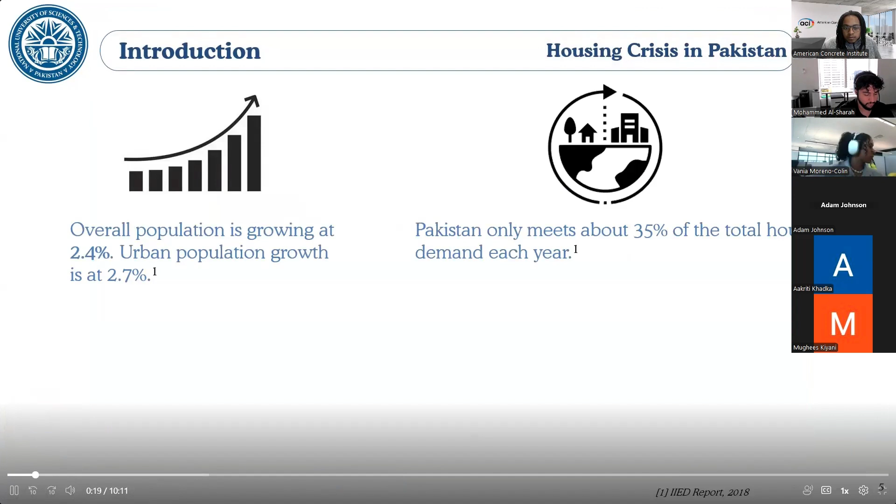Hello everyone, the topic of our research project is formulation of printable mix design for prefabricated beams. Here's our team, here's the table of contents. For introduction, let's begin by looking at a crisis that affects every corner of Pakistan, which is housing. Our population is increasing rapidly, but we're only able to meet 35% of housing demand every year. Housing prices are skyrocketing, but GDP per capita has barely increased.

So how can we solve Pakistan's housing and infrastructure crisis? Not through patchwork fixes, but with technology that fits our context. Traditional construction, currently implemented in Pakistan, suffers from extended project timelines, which decreases productivity. Labor accounts for up to 30% of total cost, and high energy consumption makes this process environmentally unsustainable. Globally, we've seen alternatives like modular construction, automation, and robotics, but one promising solution which combines the benefits of all three is 3D concrete printing.

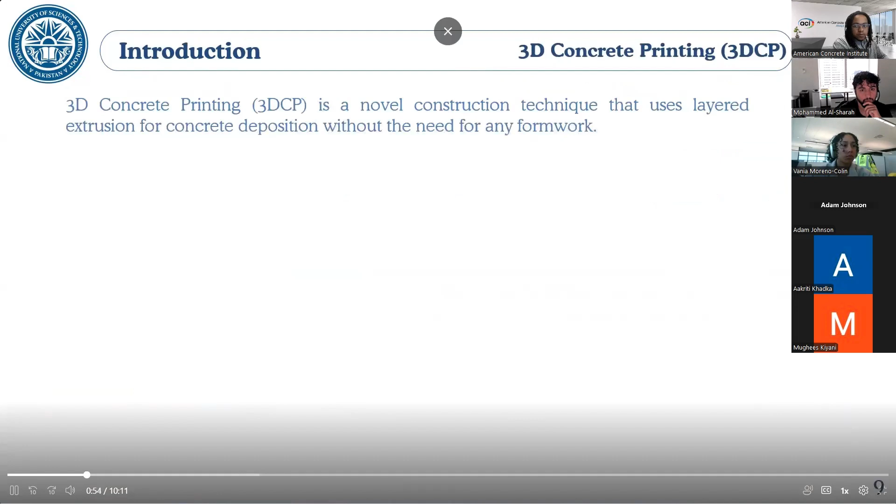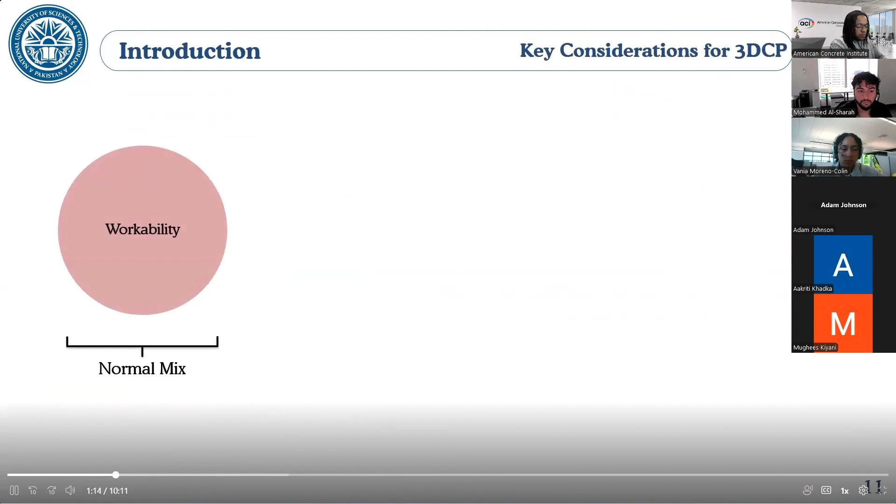It is a layered free-form technology where concrete is deposited through robotic extrusion. It starts with a digital design, formulated by material formulation, and ends in robotic extrusion. The final step is curing and finishing. It has a lot of benefits and replaces the most time-consuming and costly steps in traditional construction. In a normal mix, the only fresh property we care about is workability, but in a 3D concrete mix, you need print mix properties and process parameters, and they both have to be in harmony in order to achieve a successful print.

In literature review, we found that 3D print mix uses complex additives, which increases the cost and makes it complex to reproduce locally and scale. The printed structures have higher chances of shrinkage, so we can use fibers.

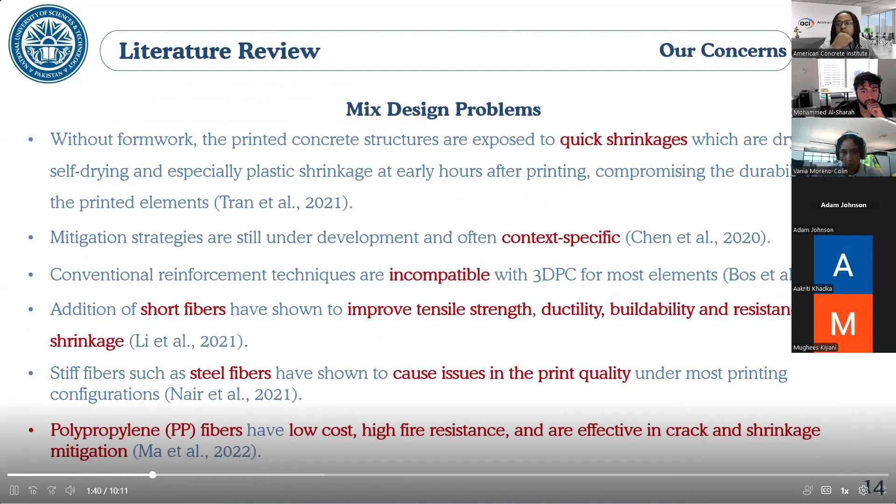Steel fibers, however, disrupt the print quality, but polypropylene fiber offer a fire-resistant alternative. 3D PC still has higher quantity of cement, so we found a sustainable partial replacement, which is metakaolin, and it also improves the compressive strength.

In 3D PC, 80% of research is done on mix design, but only 1% research is done on building level integration. And within that 1%, walls and columns are commonly printed structures. So we wanted to print and optimize beams such that they balance the material use and mechanical properties.

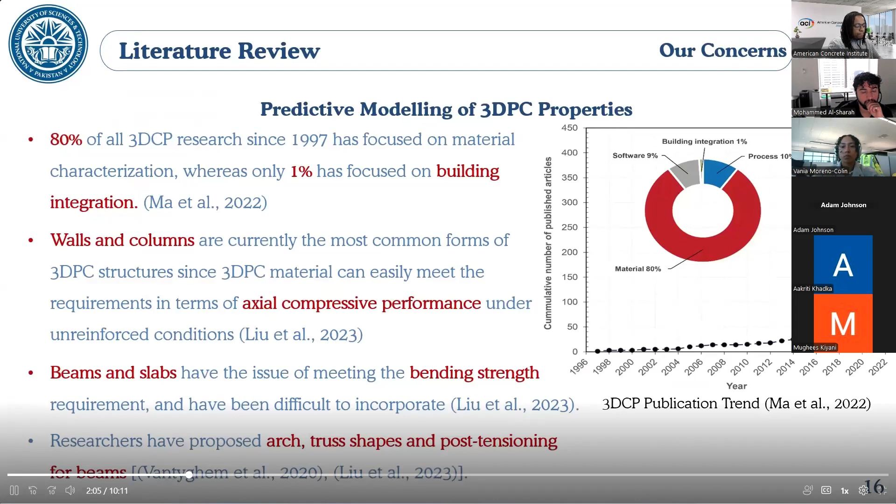Based on the literature review, we formulated two problem statements. And based on these two problem statements, we defined our objectives and divided our project into three corresponding phases.

So in phase one of our research, our objective was to develop a simple, sustainable, and of course, a printable concrete mix design. This is an overview for phase one.

After selecting process parameters and adequate mixing, each mix was assessed based on a number of fresh and hardened properties. All our materials were locally sourced, and here's the rationale for the selection of each material.

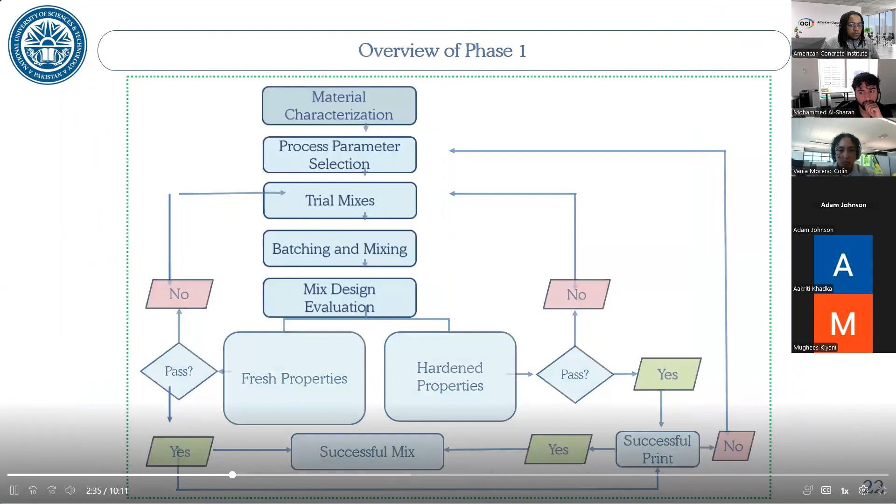Now, this slide gives an overview of the effects of each printing parameter on printing, and each plays an important role. For print, we chose a circular nozzle as it facilitated the printing of complex geometries.

Nozzle size was kept at 25 millimeters as it struck a balance between good printing resolution and good printability. Stand-off distance was kept at 15 millimeters, which gave good interlayer stability.

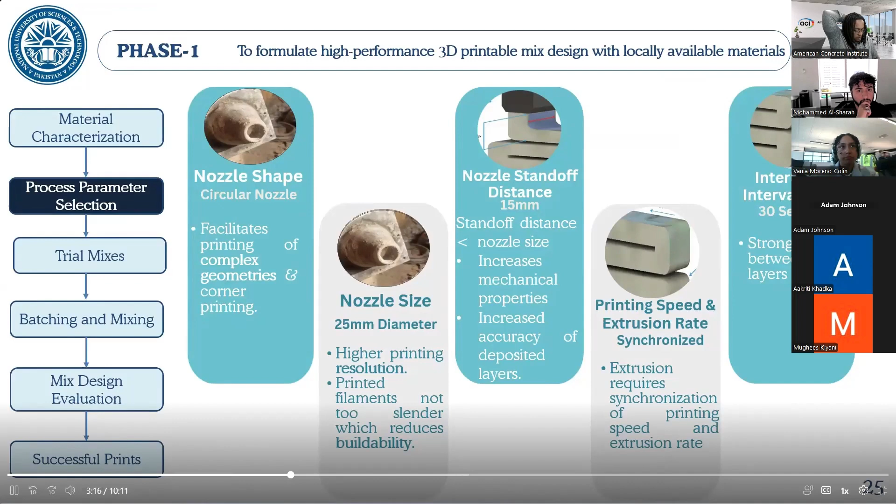Next, print speed and extrusion rate were experimentally kept in sync to avoid breakage or flat elements. And lastly, interlayer interval time was naturally about half a minute due to our short print paths.

So this is the mixing standard which we developed for the smooth flowable mix. And in this phase, we tried a total of 27 mixes, out of which we chose representative 8, which I'll shortly discuss.

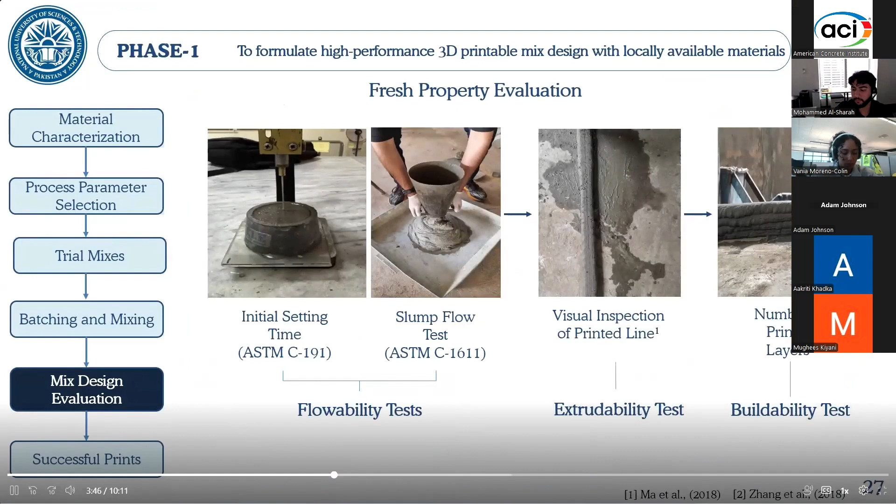So coming over to evaluation of our mixes, first we looked at the fresh properties. For the flowability, initial setting time and slump flow tests were performed, while extrudability and buildability were inspected visually.

Here, the first three mixes fell in the zero buildability region and were too flowable, while the last three were not extrudable due to being too stiff.

Mix 4 and 5 fell in the optimum slump range, and mix 4 was chosen as a base mix due to superior print quality.

The initial setting time test showed the same trend, and using that correlation, we drew an optimum range for adequate flowability.

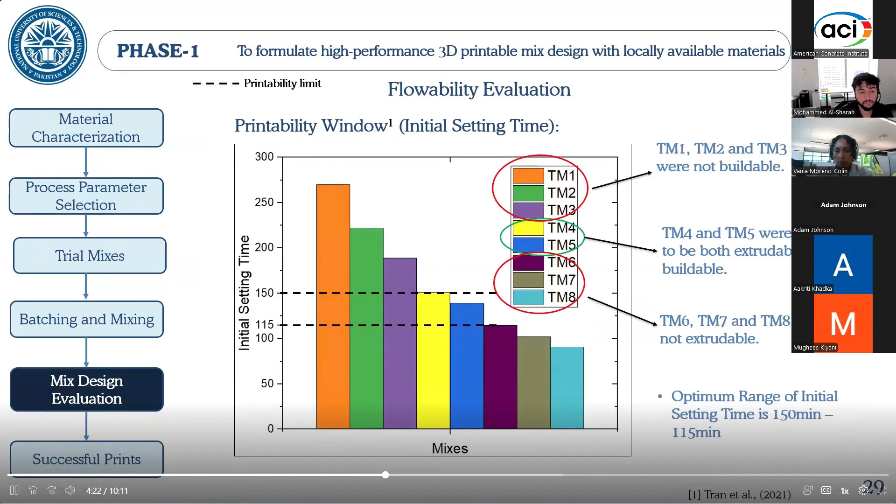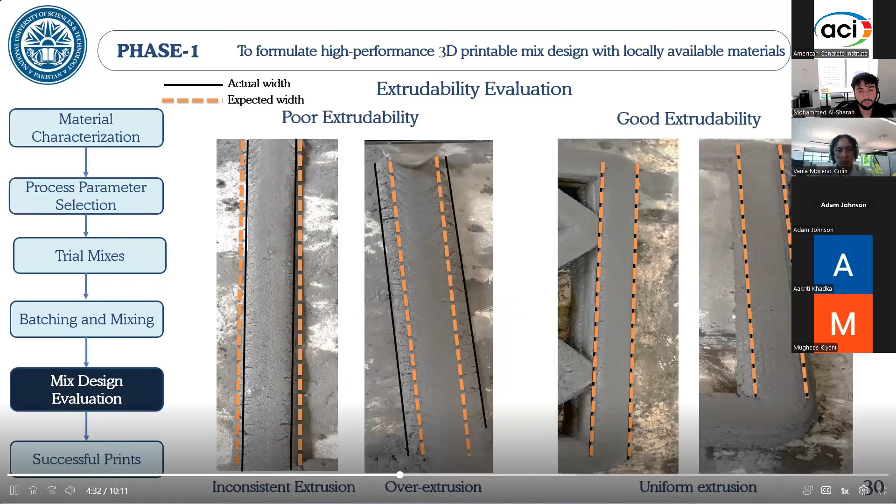These are some examples of poor extrusion. As can be seen, the expected and actual widths do not match, while these two on the right are examples of good extrudability as the expected and actual widths do match.

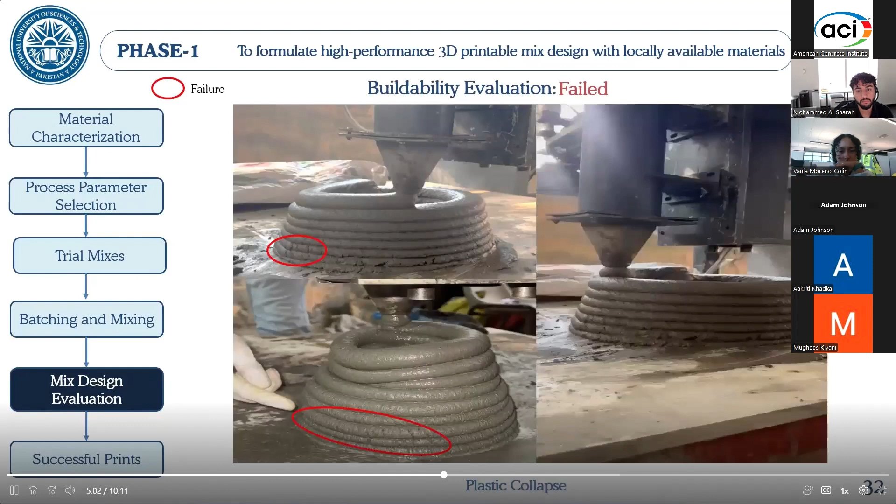Once we established our base mix, we sought to improve certain properties of our base mix with the addition of polypropylene fiber and metakaolin. This is an overview of our methodology for phase 2.

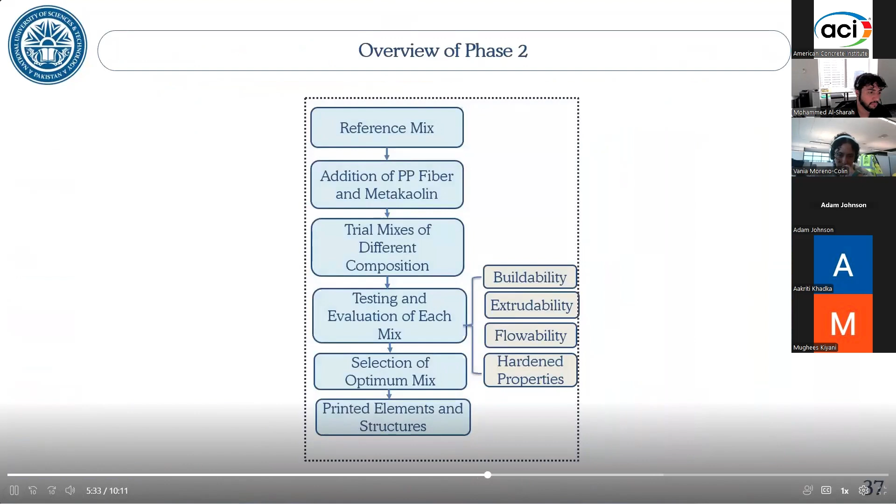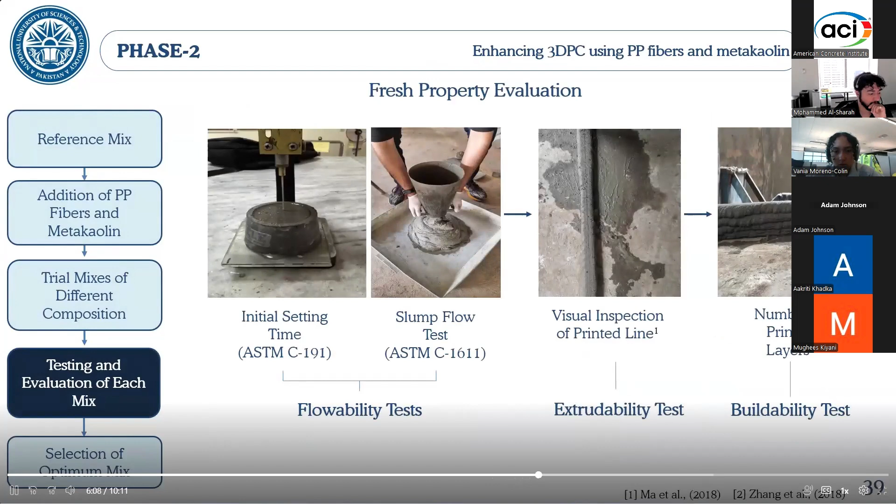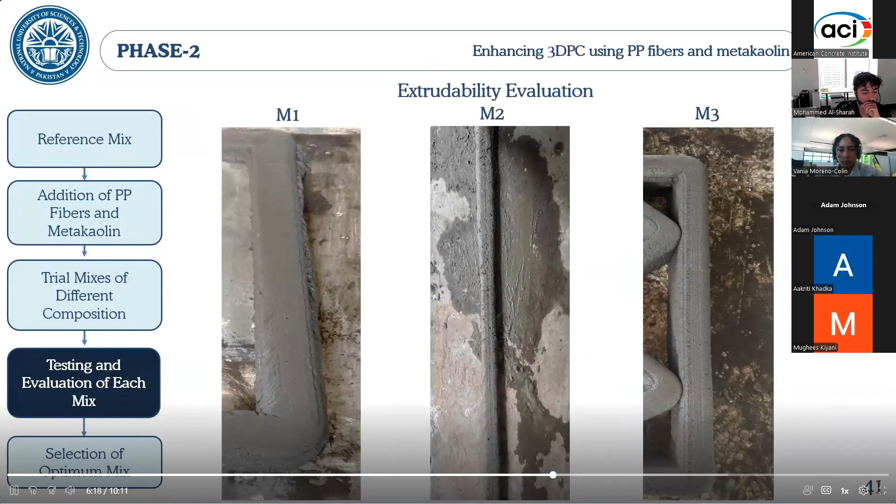Both M2 and M3 fell in the optimum flowability range, which we established while developing our base mix. M2 and M3 also passed extrudability criteria. All mixes had deformation below the limit stated in literature, so buildability wasn't an issue either. All 3 mixes also had adequate strength.

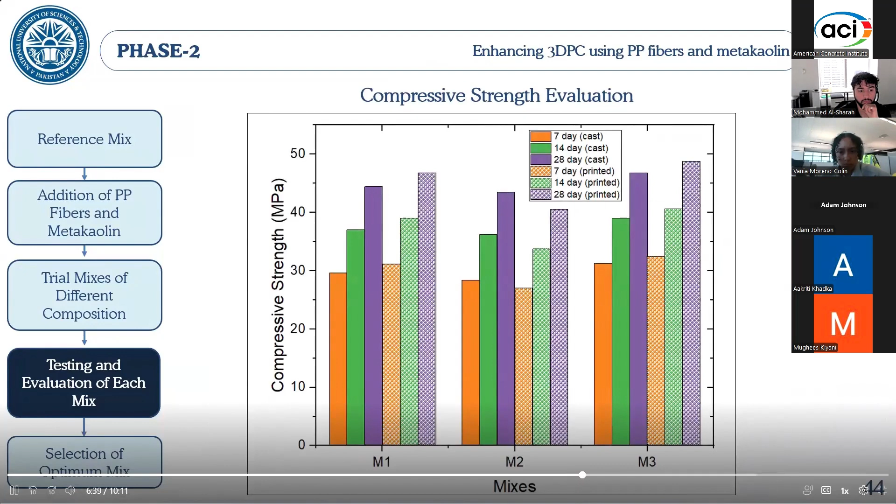This is an overview of our compressive strengths. Printed specimens showed higher strength due to the compaction caused by the nozzle of the printer.

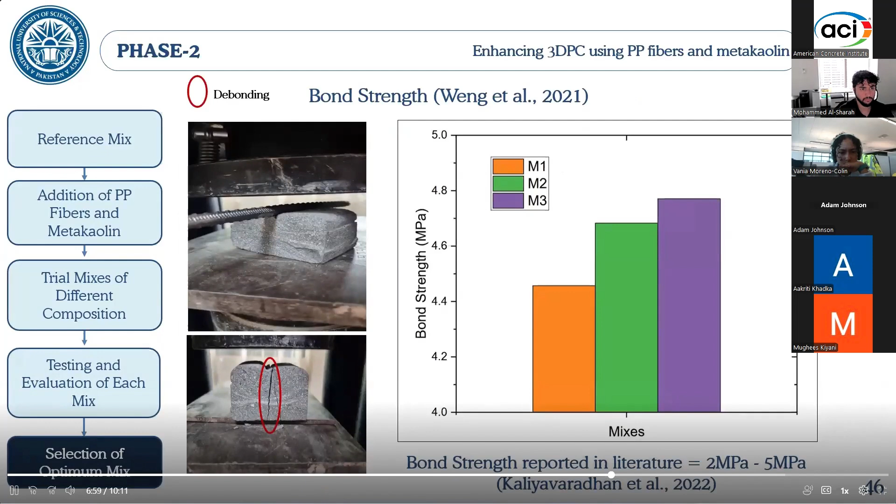So for the third and final phase, we wanted to test 3D PC beams both experimentally and numerically. Here is the overview of our third phase.

As mentioned earlier, 3DPC allows us full architectural freedom and to print optimized geometries whilst reducing the material usage and the self-weight. For this reason, we chose 2 geometries: the first one being the truss infill beam, which reduces material usage at low stress points, and the second being the arch infill beam, which efficiently distributes compressive loads.

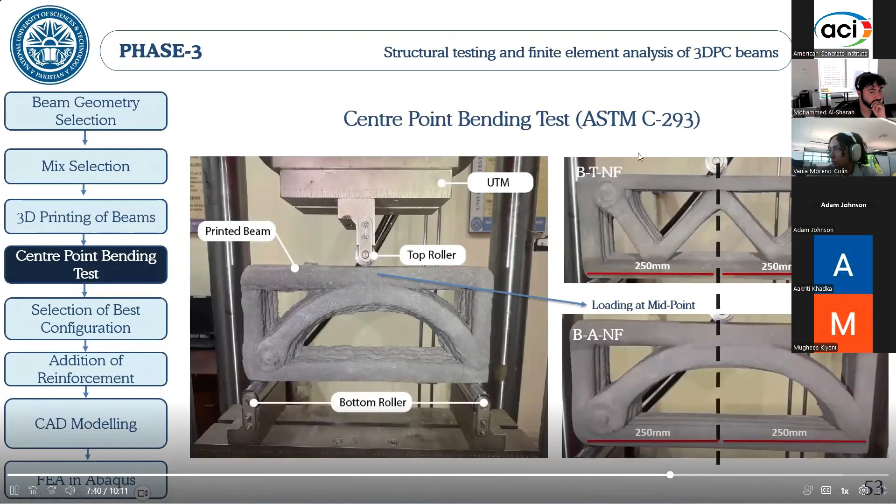Both the beams were printed using the M1 and the M2 mix. All the 4 beams were tested under the center point bending test, and crack initiation was observed for all the 4 beams. A common observance was that the cracks developed near the joints where the stress concentrations were high, mostly in the bottom fibers, and the fiber reinforced beams exhibited a ductile failure.

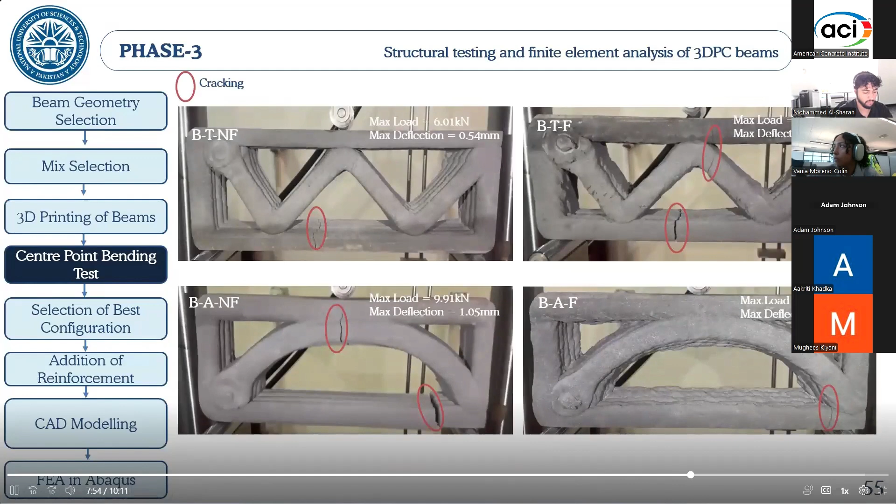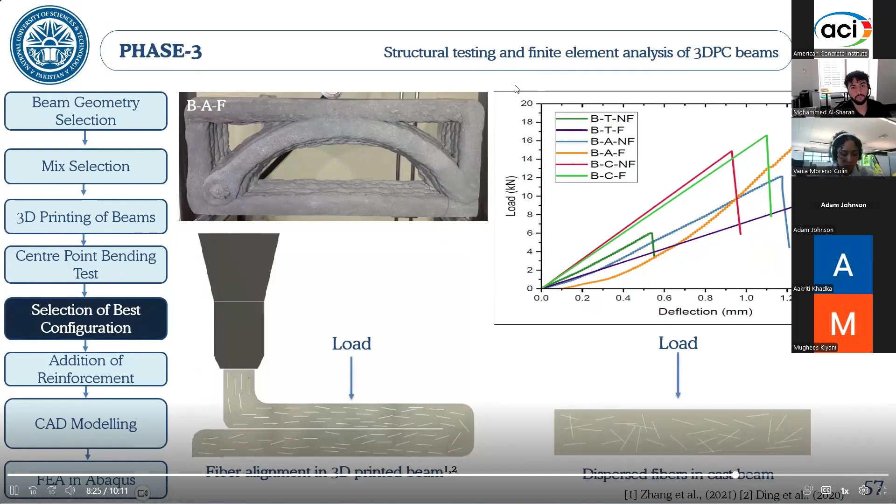This exceptional increase in the flexural strength of the arch infill beam can be attributed to the high degree of fiber alignment observed in 3D printed beams, as opposed to a cast beam in which the fibers are randomly dispersed. For the numerical analysis, we modeled the arch infill beam in Fusion 360 and imported it in Abaqus.

We used it to simulate our tests. We used a tied interaction between the layers, used static general for monotonic loading. We used roller supports on both sides to mimic the real-life experimental conditions, and used an 8-node linear brick element for the meshing.

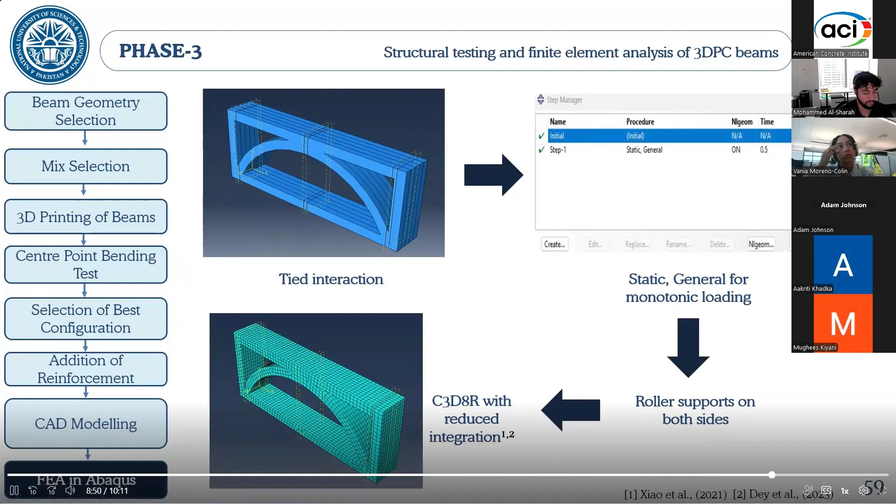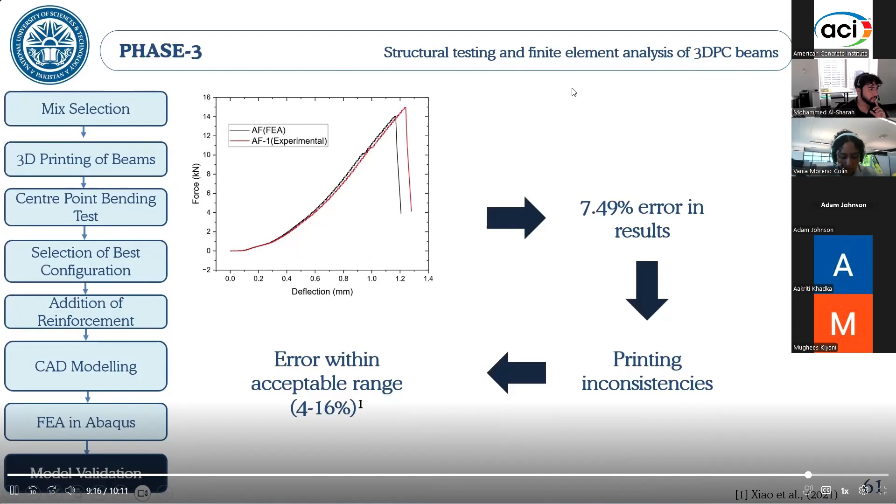Comparing the experimental and the FE results, we saw a 7.49% error in results, which can be attributed to the printing inconsistencies. However, this error was within the acceptable range as given in the literature.

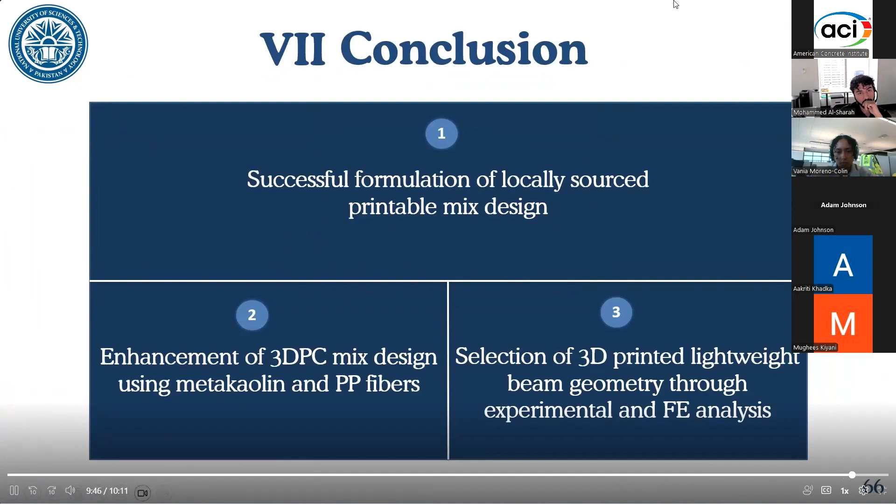For our future goals, we want to optimize this 3D printed arch infill beam via a parametric study. We aim to perform some durability tests for our 3D PC mix, and finally, we want to explore other suitable low-carbon materials in Pakistan. Ladies and gentlemen, thank you so much for your time.

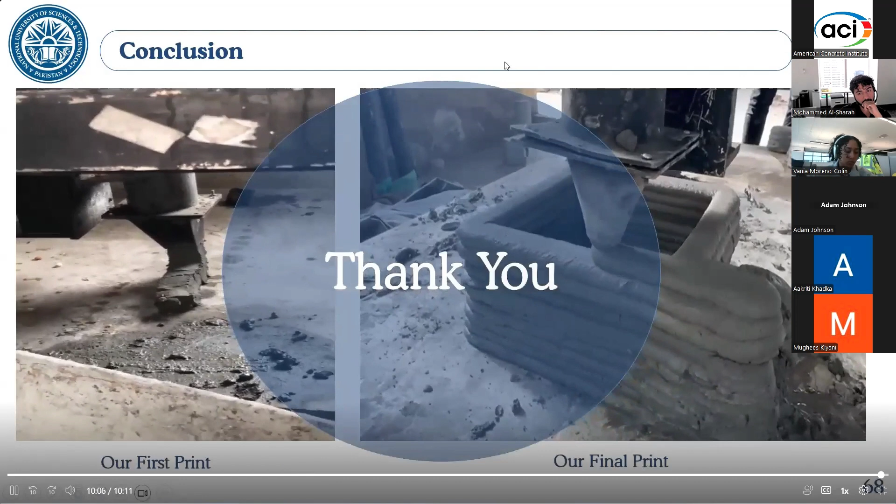Start us off. How soon do you think something like this could be implemented into industry standards and be part of our code?

Thank you so much for the question. I believe we are still at the infancy of this technology. As far as 3D printed beams are concerned, there's a call for more research on 3D printed structural elements, especially beams and slabs. So as far as industry adoption is concerned, I think we need more research, more data, and especially more research on its constructability.

As well, we need more parametric research to optimize the beam shape. So I think it could take about 4 to 5 years before we establish a proper theoretical framework on its design and constructability.

Thank you. That's exciting stuff.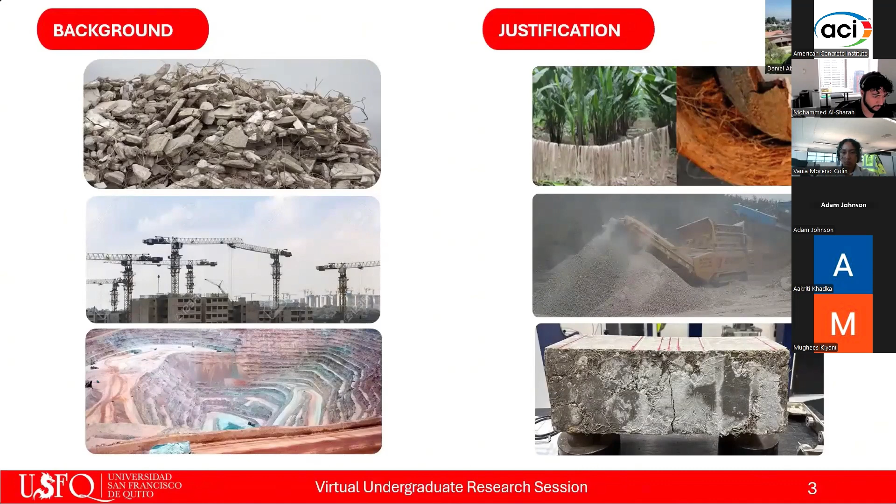A sustainable response is recycling construction and demolition waste, focusing on concrete, the most used anthropogenic material. Yet recycled aggregates often have lower quality and higher impurities, raising water absorption, reducing workability, and weakening strength. Fibers, particularly polypropylene, can improve tensile resistance and limit cracking, but they are not eco-friendly. Here, natural fibers like coconut and abaca, abundant in Ecuador, emerge as a greener alternative. This study, in collaboration with Holcim SA, evaluates concrete made with recycled aggregates and natural fibers, comparing it against traditional mixes with natural aggregates and synthetic fibers, aiming to propose sustainable large-scale solutions.

We processed 180 tons of construction and demolition waste, removing unsuitable materials like steel, plastics, and general debris. The aggregates were classified under ASTM standards into three gradations: number 57 stone, number 7 stone, and sand, with only 1% discarded as non-usable material. Recycled aggregates were obtained through debris collection, manual sorting, and metal removal using an electromagnet.

For reinforcement, we used three fibers: commercially available polypropylene fibers as the synthetic control, with a length of 2 inches and a diameter of 0.03 inches. The natural fibers, abaca and coconut, were sourced from Ecuador's Santo Domingo and Manabí provinces respectively. Both natural fibers were 4 inches long with a diameter of 0.008 inches. The modulus of elasticity of the natural fibers was tested at the Materials Laboratory of Universidad San Francisco de Quito, with the results presented.

The aggregates were first tested for gradation, density and absorption, abrasion, uniformity, and alkali-silica reactivity, following ASTM standards. Two concrete formulations were designed. The first used number 7 stone and sand due to formwork geometry, with a water cement ratio of 0.45 and 60% aggregate by weight, 60% coarse number 7 stone and 40% sand. The cement was type GU, a general use pozzolanic cement in Ecuador.

Six mixes were produced: three with natural aggregates combined with synthetic and natural fibers, and three with recycled aggregates using the same fibers. From each batch we cast 4 prisms, 20 inches by 6 inches by 6 inches, and 6 cylinders, 4-inch diameter by 8-inch height. Three cylinders were tested in compression, and one was sliced into discs 1 inch thick for dynamic modulus testing.

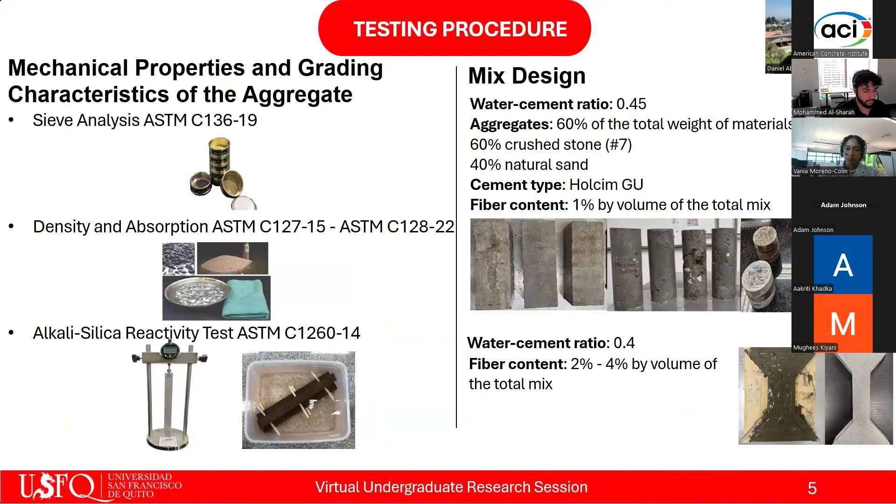We evaluated the mixes through 4 tests: compressive strength, flexural strength, dynamic modulus of elasticity, and direct tensile strength. Compression tests were performed on 4 by 8-inch cylinders after 28 days of curing. Flexural strength of the fiber reinforced prisms was measured following ASTM C1609, also at 28 days.

A key parameter of this study was the dynamic modulus of elasticity, assessed on 4-inch discs, 1 inch thick, made with different aggregate and fiber combinations. The test followed Hutchinson's model of flexural vibration of circular plates with free boundaries, where the modulus is derived from the natural vibration frequency. The procedure involved dropping a 150 gram steel ball on the center of each disc. A high-frequency accelerometer was glued to the opposite side, and its signal amplified and sent to an oscilloscope. Using MATLAB and a fast Fourier transform, we extracted the dominant frequency to calculate the modulus based on Lemming's studies.

Direct tensile strain was measured on dog-bone specimens cured for 14 days. A speckled pattern was applied for digital image correlation (DIC) to capture strain. The tests were performed on a universal machine with custom grips at a loading rate of 0.08 inches per minute.

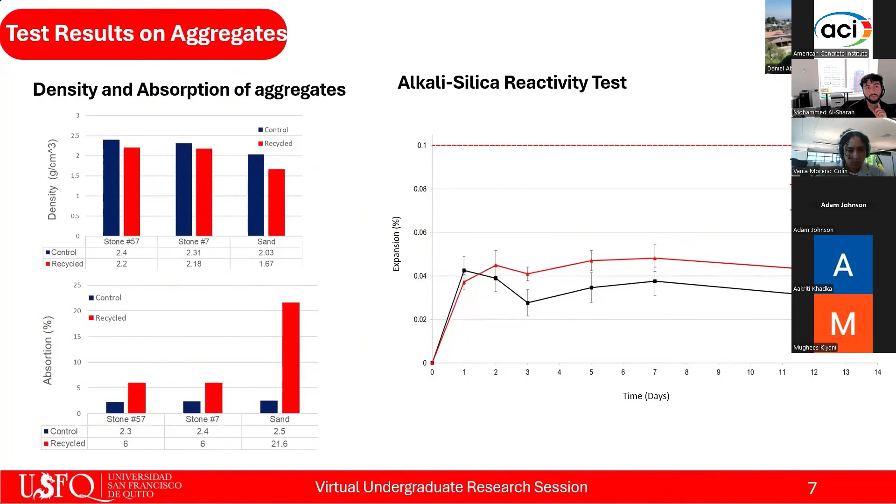This suggests that neither sand presents a significant risk of internal expansion. These results are shown in a line graph with time on the x-axis and expansion on the y-axis.

We performed 3-point bending tests to measure peak flexural strain, post-cracking behavior, stiffness, and energy absorption of the fiber reinforced mixes. In terms of ductility after cracking, all beams meet the minimum deformation required by the standard, about 0.14 inches, except the one with coconut fiber and natural aggregates, which reached only 0.07 inches, roughly half of the required value. This confirms that the proper addition of fiber significantly enhances post-cracking ductility.

For peak load, mixes with recycled aggregates and natural fibers showed reductions of about 2/5, 1/4, and 1/3 compared to the control mix with polypropylene fibers and normal aggregates.

Analyzing post-peak behavior, all beams except those with abaca fibers maintain relatively stable strength after the maximum load. Beams with polypropylene fibers resisted on average 15 kilonewtons after the peak, those with abaca fibers about half of that, and those with coconut fibers roughly 1/3.

Toughness, measured as the area under the load displacement curve, varied notably with fiber type. Polypropylene fibers achieved the highest energy absorption, around 54 joules. Abaca fibers reached about half that value, while coconut fibers showed roughly 1/4. These differences reflect the higher energy absorption capacity of synthetic fibers compared to natural ones.

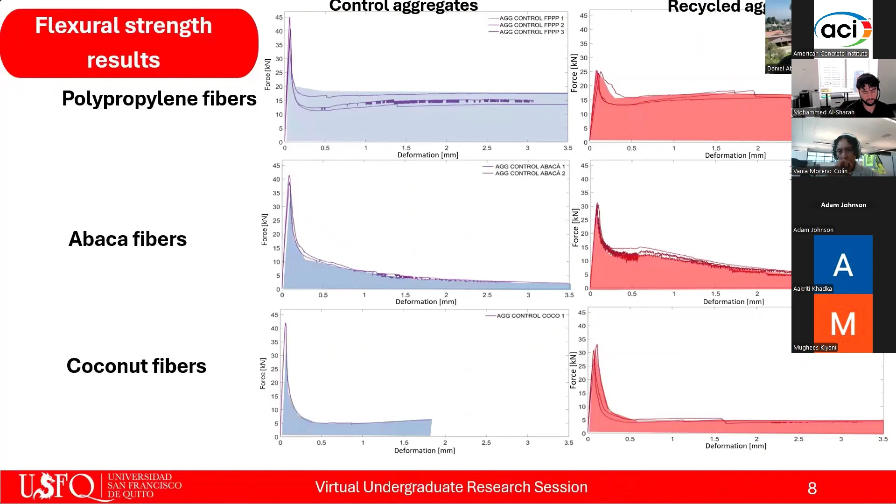The direct tensile test confirmed the same pattern seen in flexural behavior. At a 4% dosage, mixes with synthetic fibers show the highest deformation capacity and energy absorption compared to the natural fibers. However, maximum tensile strength revealed a different trend.

At the lower dosage of 2%, natural fibers, especially coconut and abaca, outperformed polypropylene. At 4%, coconut and polypropylene reached similar peak strengths, while abaca achieved the highest tensile strength of all mixes. This gain in strength with abaca, however, came with reduced deformation capacity compared to synthetic fibers.

In peak flexural load, coconut fibers were the strongest with natural aggregates, carrying a little over 45 kilonewtons, while polypropylene followed at just about 40, and abaca slightly below that.

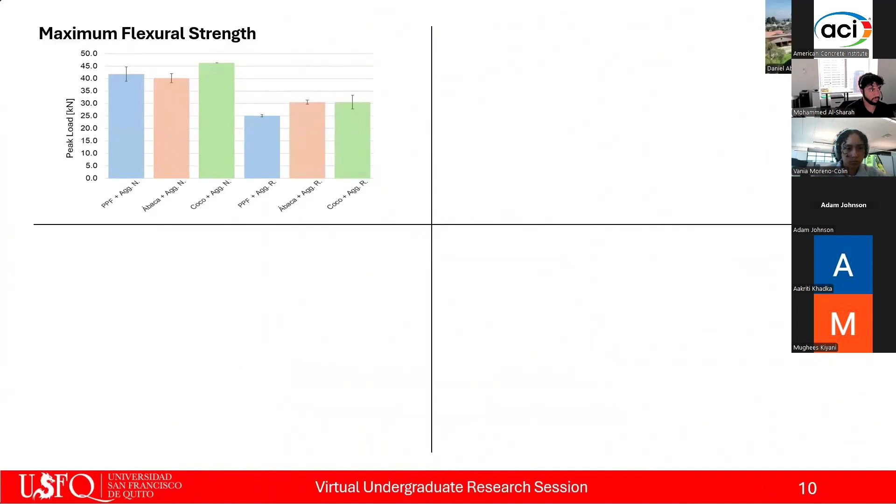With recycled aggregates, coconut again led at around 30 kilonewtons, very close to abaca, while polypropylene dropped noticeably to about 25 kilonewtons. For toughness, recycled aggregates had a clear benefit. With synthetic fibers, energy absorption reached around 55 joules, well above the values of the same mix with normal aggregates.

Overall, the fiber type defined the response. Synthetic fibers delivered the greatest toughness, while coconut fibers allowed lower energy absorption.

In compression, using recycled aggregates lowered the strength by roughly 1/3 compared to normal aggregates. Even so, coconut and abaca fibers added a slight recovery, likely due to internal curing from water retention. Fiber type did not change compressive strength directly, but it did influence curing behavior.

In direct tension, every fiber reinforced mix surpassed the baseline cement paste. Abaca fibers stood out, reaching up to 2.12 megapascals, followed by coconut and then polypropylene, which improved notably at higher dosage. Here again, synthetic fibers allowed larger deformation, indicating greater energy absorption capacity.

The dynamic modulus of elasticity was measured at 30 and 240 days. In all cases, the resonance frequency increased over time, indicating a higher modulus and overall stiffness. With natural aggregates, the largest gain came from mixes with polypropylene fibers, up by about 7%, followed by coconut at nearly 7%, and abaca with a minimal rise of less than 1%.

For recycled aggregates, the same trend appeared, but with smaller increases: polypropylene up nearly 5%, coconut about 3.5%, and abaca around 3%. Over time, resonance peaks also became more symmetrical, suggesting improved internal structural stability.

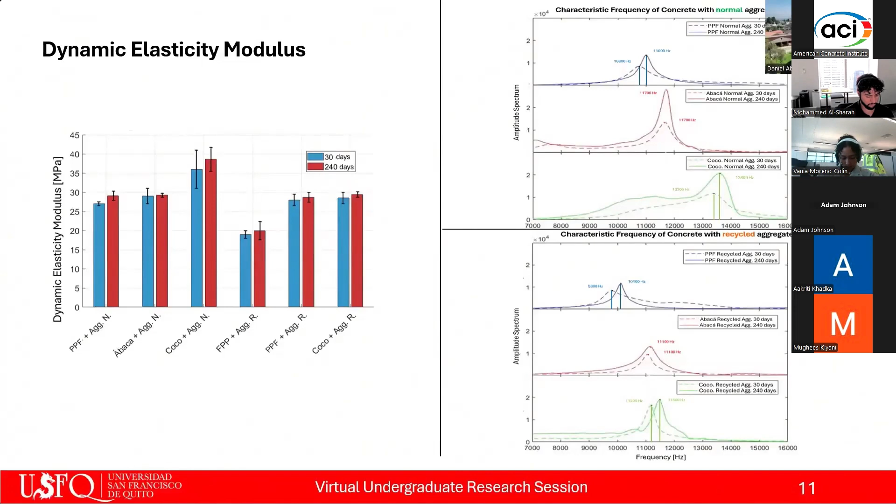Finally, the key findings. We developed sustainable concrete using recycled aggregates and natural fibers like abaca and coconut. Recycled aggregates boosted toughness by about one third, but lowered the dynamic modulus by nearly one fifth. On the strength side, they reduced compressive strength by roughly one fourth and flexural strength by about a third.

Compared to polypropylene, natural fibers absorbed less energy, about half with abaca and less than a third with coconut. But at a 4% dosage, abaca achieved the highest tensile strength among all natural fibers. Polypropylene at 4% offered the greatest deformation capacity, while all fiber reinforced mixes surpassed the tensile strength of plain cement paste.

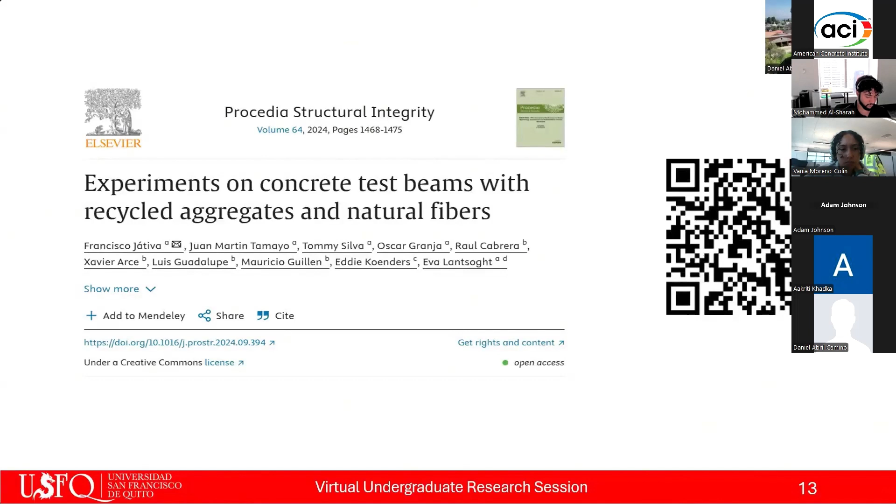Part of this work was published in a scientific article developed by the Universidad San Francisco de Quito. I am attaching a QR code that links directly to the publication for further reference. Thank you very much for your attention.

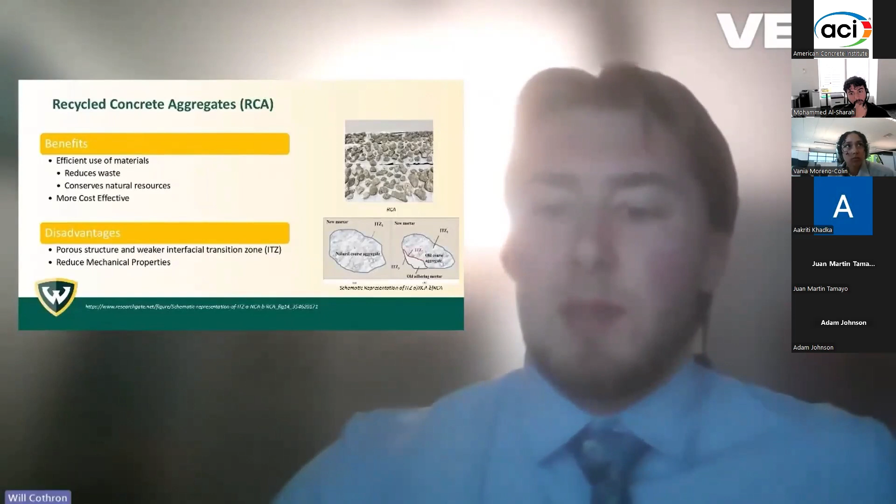Some of the disadvantages of RCAs include the porous structure and the weaker interfacial transition zones, as illustrated in the schematic on the right, comparing natural aggregates to RCAs. Unlike natural aggregates, RCAs contain a double ITZ layer: the old ITZ between the original natural aggregate and the adhered mortar, and the new ITZ between the adhered mortar and the fresh cement paste. The adhered mortar within this new ITZ layer contributes to increased porosity, allowing greater water absorption and altering the overall water to cement ratio. This results in a weaker microstructure with poorer bonding between particles, ultimately leading to reduced strength and durability in RCA concrete.

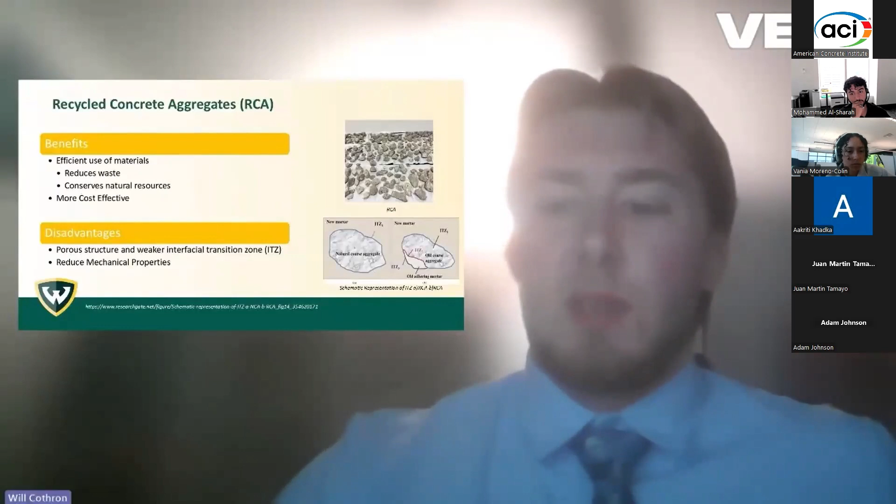Natural aggregates and recycled concrete aggregates need to be washed and dried before adding them to the mix. For the recycled aggregates, once the materials have been dried, they need to be placed into the carbonation chamber for 24 hours to start the carbonation treatment. The recycled concrete aggregates inside the chamber are exposed to CO2 gas at a concentration of 12%, temperature of about 23 degrees Celsius.

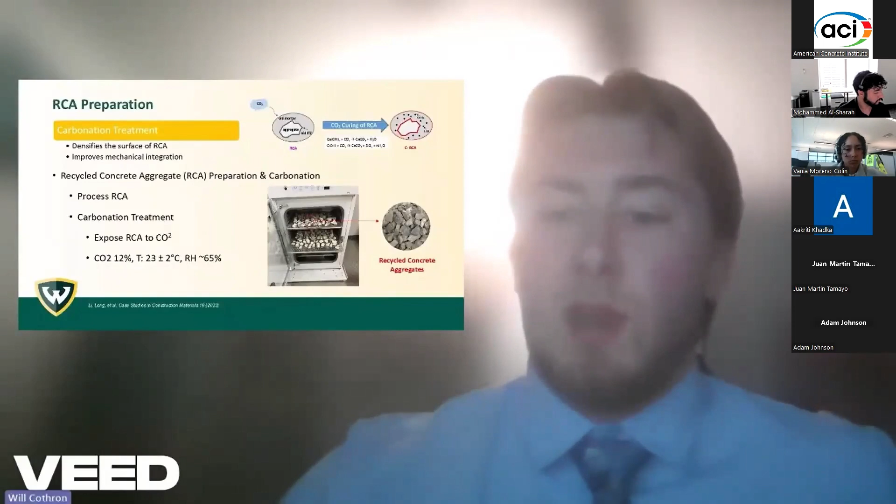This carbonation process allows the CO2 gas to react with the old mortar on the surface of the RCA particles. As shown in the diagram at the top, these chemical reactions form a denser and stronger outer layer by producing calcium carbonate and silica. The photo on the bottom right shows our actual RCA samples undergoing this carbonation treatment in the lab.

Carbon nanotubes, or CNTs, are tiny tube-shaped materials at the nanoscale made from rolling sheets of graphene. They have great potential to make concrete stronger and smarter, but there's a challenge. CNTs naturally clump together because of something called van der Waals forces. To fully use their potential, CNTs must be evenly dispersed throughout the concrete mix.

We achieve this by adding CNT powder into water along with a special chemical called a surfactant, which helps separate the CNT particles. Then we applied a technique called ultrasonication, where high energy sound waves break apart the clumps, distributing CNTs uniformly in the water. The result is a stable CNT suspension that's ready to mix into concrete.

Properly dispersed CNTs help make the concrete stronger, more durable, and even give it smart properties like self-sensing abilities. Results reported in the literature have consistently demonstrated that properly dispersed CNTs enhance concrete strength and durability, and can even provide smart properties such as self-sensing capabilities.

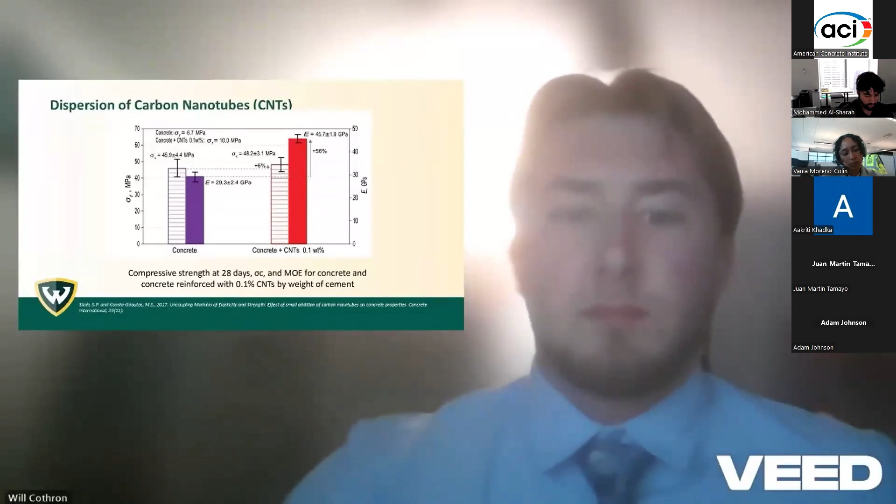In our study, we developed different concrete mixes to evaluate the effects of using recycled concrete aggregates, carbonation treatment, and carbon nanotubes on the properties of concrete. We prepared 4 different concrete mixes: our control, which is our standard concrete; our control CRCA mix, which is our carbonated RCA without CNTs; our CNT mix, which is our standard concrete with CNTs; and our CNT CRCA mix, which is our carbonated RCA with CNTs.

Each mix used cement type 1L standard cement, natural aggregates or recycled concrete aggregates, both in saturated surface dry conditions, and carbon nanotube suspension when applicable. The exact proportions of water, cement, sand, and aggregate used was maintained at a ratio of 0.51, 1, 2.63, and 2.04 to ensure consistency and comparability.

The concrete mixes were prepared according to ASTM C192 standards, and the fresh concrete's workability was measured using the slump test, ASTM C143. For evaluating strength, we cast concrete cylinders 4 inches by 8 inches, cured them at controlled conditions, and tested their compressive strength after 7 and 28 days, following ASTM C39.

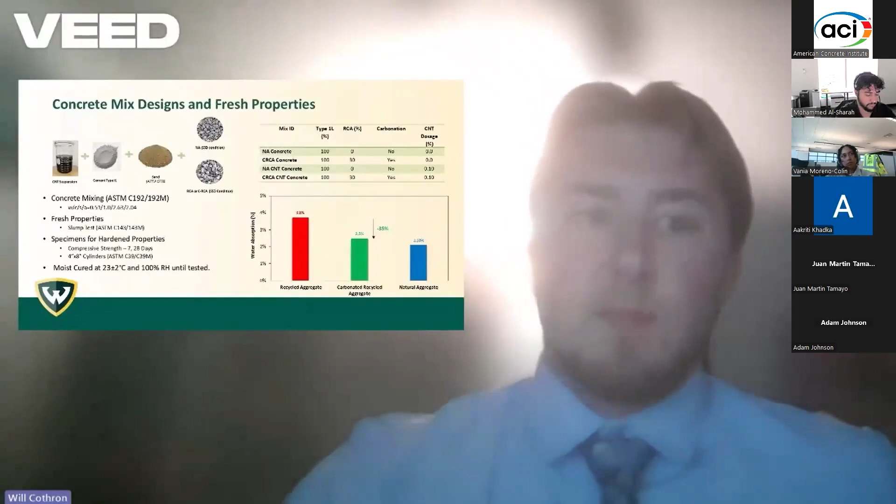These TGA results clearly demonstrate that the carbonation process effectively converted calcium hydroxide into calcium carbonate. This chemical change densifies the surface of RCA as shown from the reduced water absorption in the previous slide.

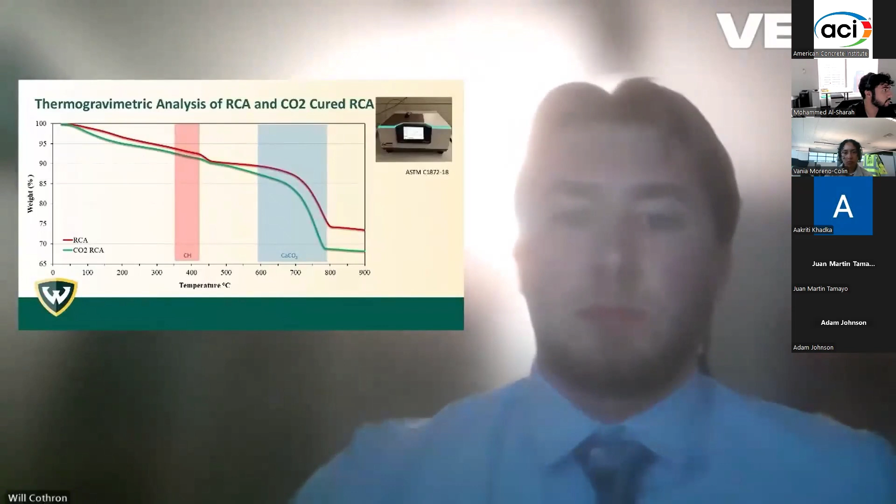To understand how carbonation treatment and carbon nanotubes affect the fresh properties of concrete, we performed slump tests following ASTM C143. The natural aggregate concrete exhibited a slump of 9.75 inches, indicating good workability, typical of conventional concrete mixes. After carbonation, the slump decreased to 5.25 inches. This reduction in slump corresponds to the decreased water absorption. We previously observed through the TGA and water absorption tests that we have a denser aggregate surface after carbonation.

With the introduction of CNTs, the slump increased to 11 inches, indicating improved workability and flowability. CNT dispersion likely contributed to lubricating effects, enhancing workability. Interestingly, the CRCA concrete containing CNTs exhibited a significantly reduced slump at 1.75 inches, likely due to a combined effect of denser aggregate surface due to carbonation and the presence of CNTs.

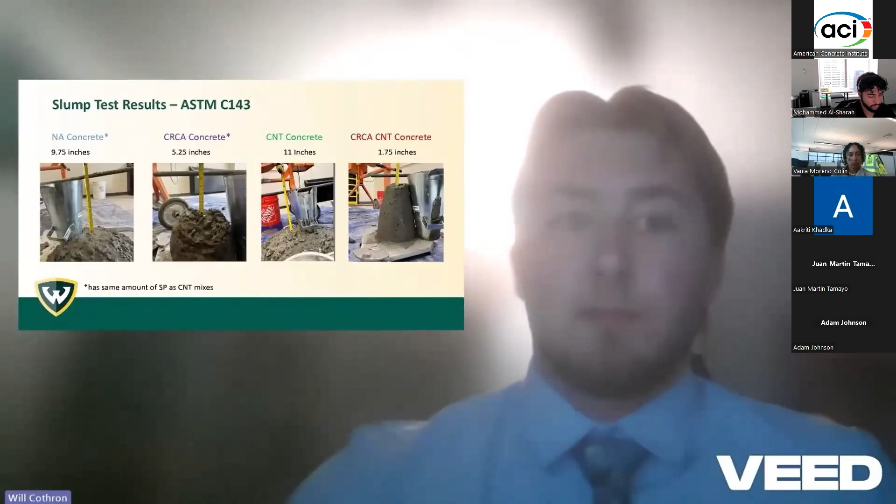To assess how our concrete mixes performed in terms of strength, we conducted compressive strength tests on cylindrical samples following ASTM C39. We tested the samples at 7 days and 28 days.

Natural aggregate concrete showed approximately 47 MPa at 7 days and 54 MPa at 28 days. Typically, using recycled concrete aggregates in concrete mixes can reduce their strength due to the presence of weaker old mortar layers.

However, our results indicate that carbonation significantly enhances the properties of RCA. Carbonated recycled concrete aggregate concrete exhibits similar strength to the natural aggregate mix, reaching around 48 MPa at 7 days and 53 MPa at 28 days, indicating that carbonation effectively overcame the typical strength reduction associated with recycled aggregates.

When we introduced carbon nanotubes into the mixes, the compressive strength improved notably. This enhancement is due to the CNTs reinforcing the microstructure, making the concrete denser and more cohesive.

The CNT concrete mix achieved a higher strength compared to both control mixes and exhibits results similar to those reported in the literature. The combination of CRCA and CNTs exhibits the highest strength of all mixes tested, reaching around 51 MPa at 7 days and exceeding 59 MPa at 28 days.

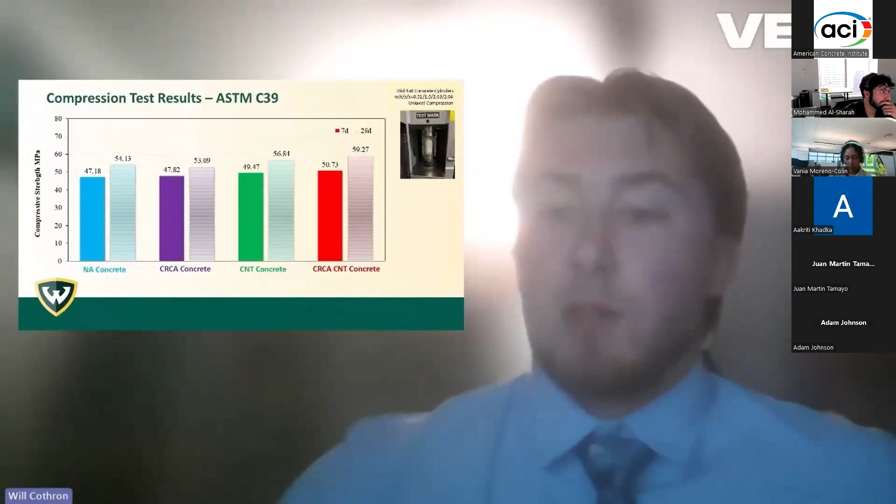The results indicate that CNT reinforcement effectively compensates for any residual weakness in the recycled aggregates, resulting in a concrete that not only meets structural requirements but also offers enhanced environmental benefits. These findings demonstrate that using carbonation-treated recycled aggregates along with CNTs is a viable and sustainable solution for concrete construction, delivering both strength and ecological advantages.

This research demonstrated that carbonating recycled concrete aggregates significantly reduces water absorption and improves mechanical performance, as confirmed by TGA analysis. Carbonation allows CRCA to achieve strength similar to natural aggregates, making it a viable, sustainable alternative.

The addition of carbon nanotubes further enhances concrete strength through improved microstructure. Our strongest mix combines CRCA and CNTs, indicating these two innovations have complementary effects. Future work will focus on assessing long-term durability, advancing our goal of resilient infrastructure solutions.

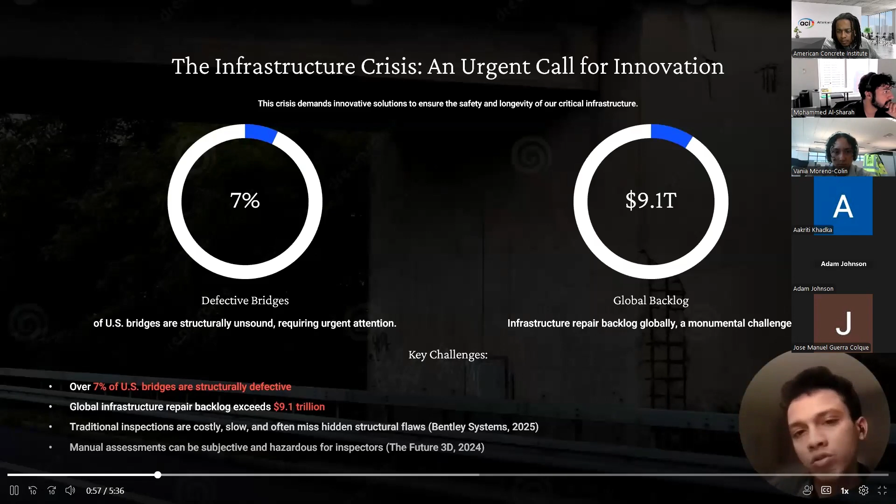Let's compare the old and the new. Traditional methods rely on visual inspections, manual data collection, and human judgment, all of which are slow, subjective, and hazardous.

On the other hand, AI-powered inspections are automated, objective, and highly accurate, with up to 99.7% crack detection accuracy and a 75% reduction in inspection time. These systems deliver better results at a fraction of the cost.

At the core of this transformation is the digital twin, a virtual replica of a physical structure. These twins integrate live data from sensors, 3D modeling, and historical tracking. They don't just capture the current state of a structure, they forecast deterioration, guide maintenance decisions, and provide complete digital traceability. In short, digital twins bring infrastructure to life in the cloud.

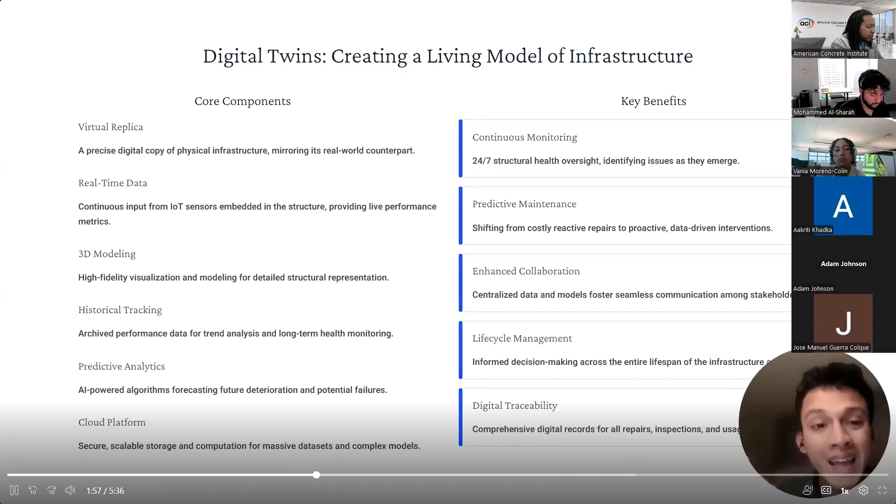The backbone of this intelligence is AI, especially convolutional neural networks trained on large datasets like SDNet 2018. These models detect cracks as small as 0.06 millimeters with 99.7% accuracy and a 99% F1 score.

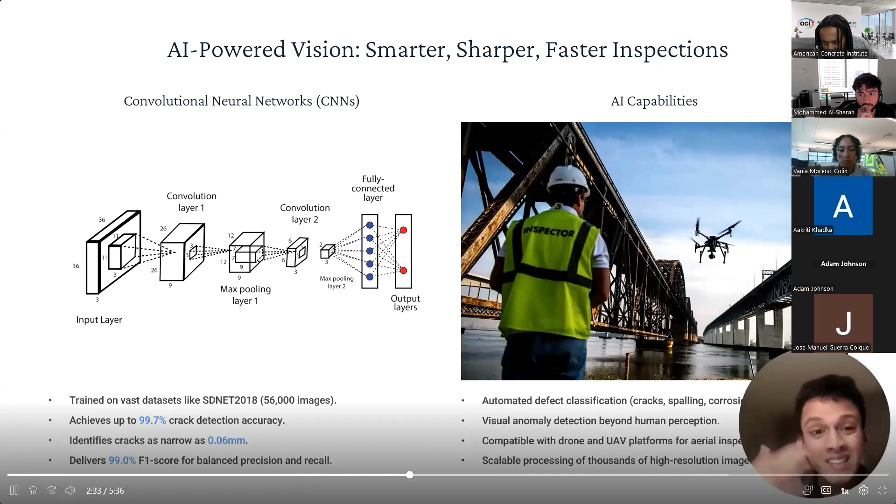They work with drone footage, classify different types of damage, and process thousands of images, all in minutes. The result? Fast, precise, and scalable assessments far beyond what human eyes can do.

Here's a real example. The 140-year-old Stone Arch Bridge in Minneapolis underwent an AI-powered digital twin upgrade. Over 13,000 drone images were used to build a detailed model.

The results? A 20% reduction in inspection time, up to 15% savings in rehab costs, and only 4 days of closure instead of weeks. This case shows how digital twins enhance precision while minimizing disruption.

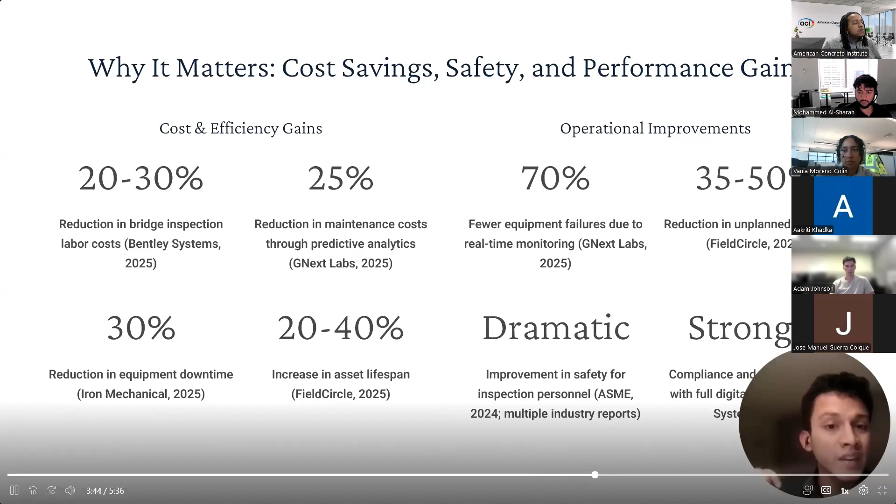Well, the return on investment is remarkable. AI-powered systems cut inspection labor costs by up to 30%, reduce maintenance costs by 25%, and extend asset lifespan by as much as 40%. Operationally, equipment failures drop by 70%, and unplanned downtime is cut nearly in half. These aren't just statistics. They are industry-proven results from real-world implementations.

Implementing a digital twin system follows three key phases. First, data is captured using drones, LiDAR, and sensors. Second, that data builds a high-fidelity 3D model integrated with existing asset systems. AI models are then trained for the specific structure. Finally, the system is deployed with real-time monitoring and predictive maintenance, and it keeps learning and optimizing as new data flows in.

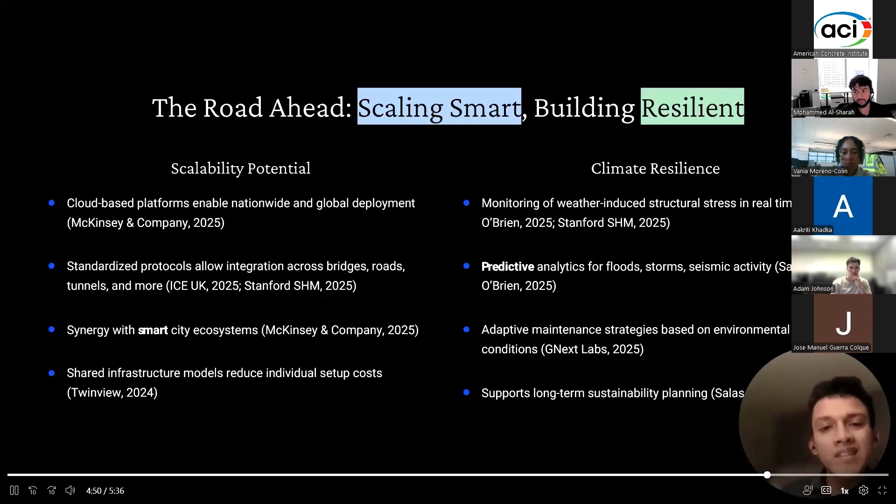Looking forward, this technology is built for scale. Cloud platforms allow nationwide deployment, and standard protocols ensure compatibility across roads, bridges, and tunnels. It also supports climate resilience, monitoring stress from floods, heat, and seismic activity, and adapting maintenance strategies accordingly. In a rapidly changing world, this is how we make infrastructure smarter and future-proof.

In summary, AI-powered digital twins aren't just innovation, they are necessity. With proven accuracy, real-world success stories, and unmatched ROI, they represent a new era in structural safety. As engineers, planners, and innovators, we now have the tools to shift from reactive fixes to proactive prevention, making infrastructure safer, longer lasting, and climate ready.

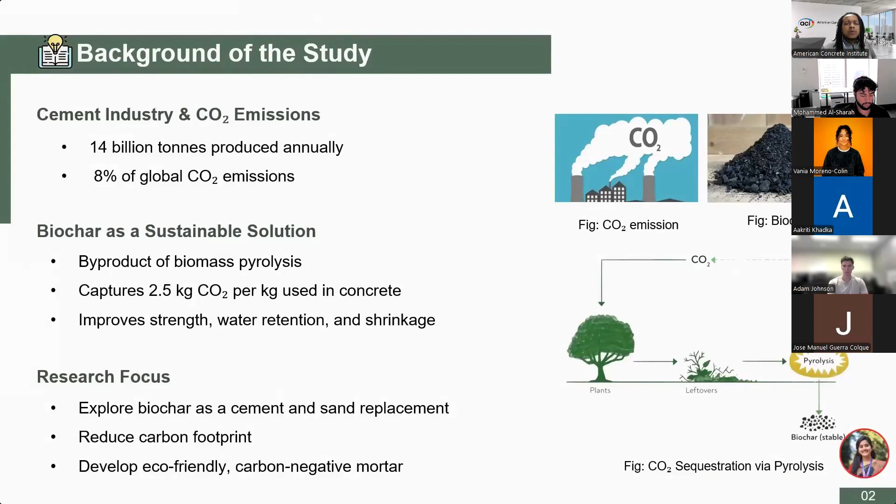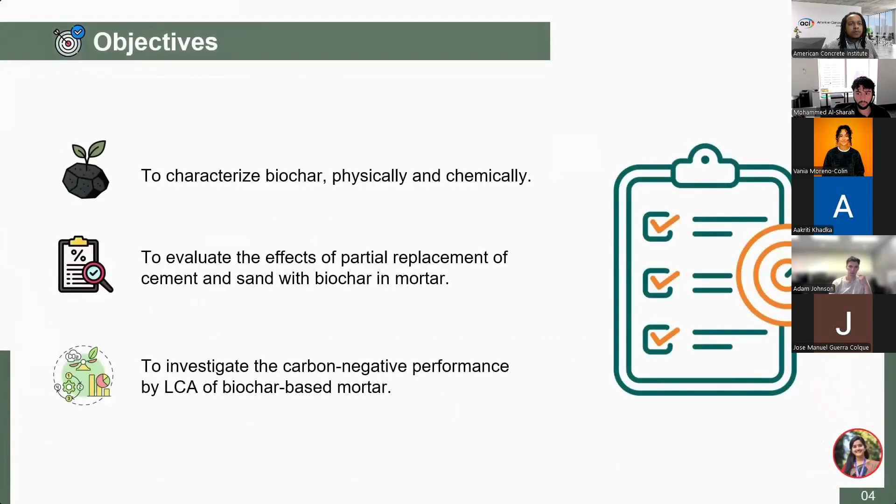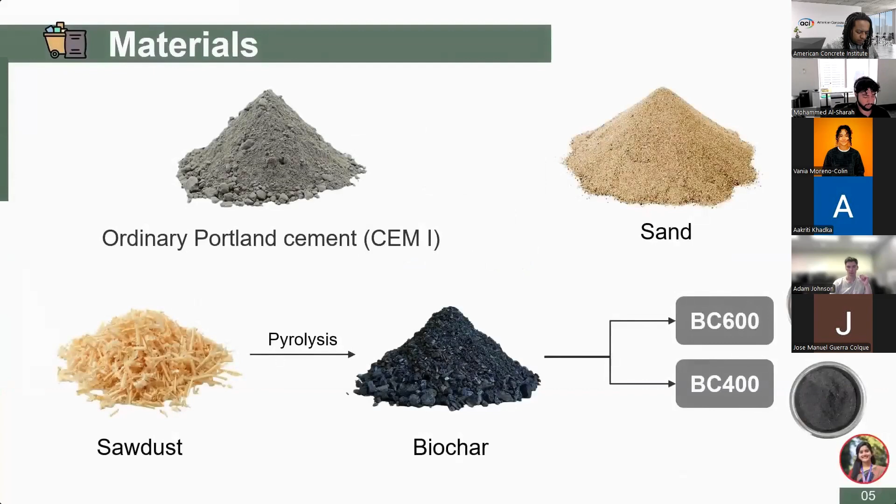These are the materials that we used in our study. Two types of biochar were used, BC400 and BC600. BC600 was made at 600 degrees Celsius using a lab furnace, which makes it more controlled but costly. On the other hand, BC400 was produced at 400 degrees Celsius in a simple pit kiln, making it much cheaper and easier for field use.

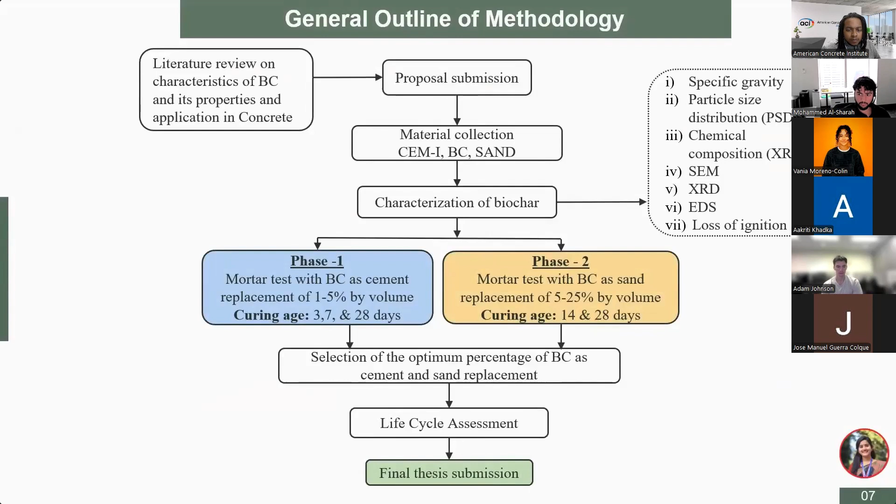This is the general outline of our methodology. After collecting the biochar, we tested the characterization of this material. After that, cement was replaced with biochar by 1 to 5% by volume with a curing age of 3, 7, and 28 days. Then sand was replaced with biochar of 5 to 25% by volume with a curing age of 14 and 28 days. Then the necessary tests were conducted, and then we did a full-fledged life cycle assessment of our approach.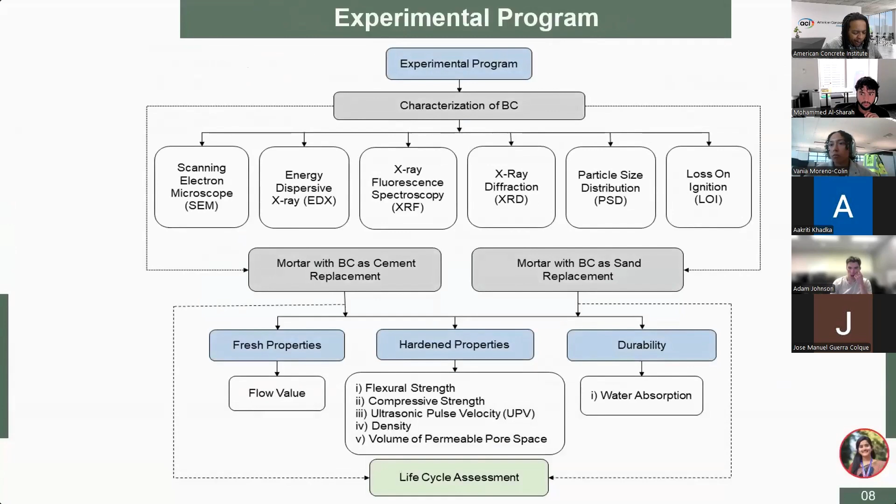Thank you, Shatabdi. Now let's focus on the results portion. Firstly, the characterization of biochar, starting with SEM test results. The first row of images represents BC600 and the second row is for BC400. In BC600, the overall structure has uniform porosity; these pores are like rounded honeycomb and the outer surface is smooth. On the other hand, for BC400, the overall structure has low feedstock uniformity; pores are mostly flaky, thin plate-like shape, and the outer surface is rough.

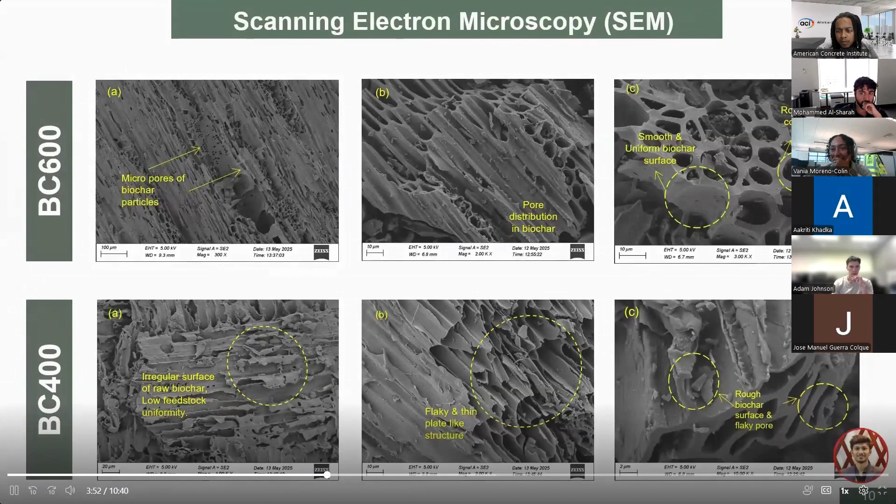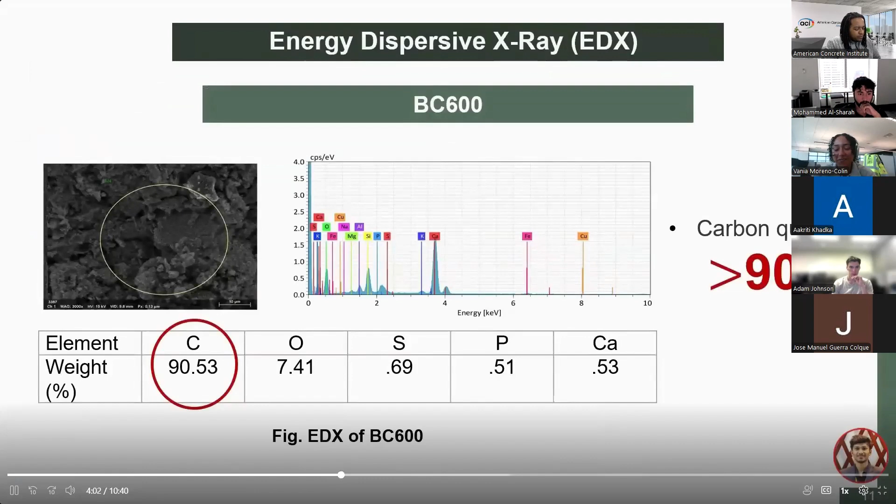In the EDX test results, we found that BC600 has a carbon quantity of more than 90%. On the other hand, BC400 has more than 80% carbon quantity. This percentage of carbon ensures higher carbon sequestration capability of biochar. In the XRF test results, we found 25% silicon dioxide and 35% calcium oxide. This value helped in the strength gain of mortar, which we will see in the upcoming slide.

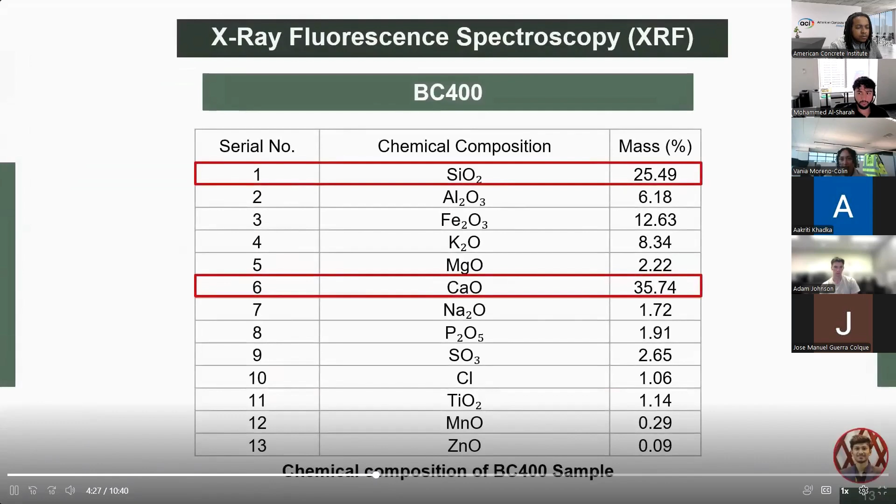Now the test result from mortar samples. Firstly, cement replacement. Initially, we used a fixed water-cement ratio of 0.5 in the mix, but we observed very low flowability and poor strength performance.

To ensure proper compaction, we adjusted the water content to achieve a flow of 135 plus minus 5 mm. As a result, the water-cement ratio varied between 0.7 to 0.77 for both types of biochar. This adjustment helped reduce voids and produce a denser mortar due to better compaction.

From the flexural strength performance, BC 600 showed that the flexural strength slightly decreased up to 3%, but at 4% it showed higher strength than the control. On the other hand, BC 400 showed an increase in flexural strength up to 2% replacement, after which the strength gradually decreased. However, both types of biochar demonstrated satisfactory flexural strength performance, aligning well with the findings reported from the literature.

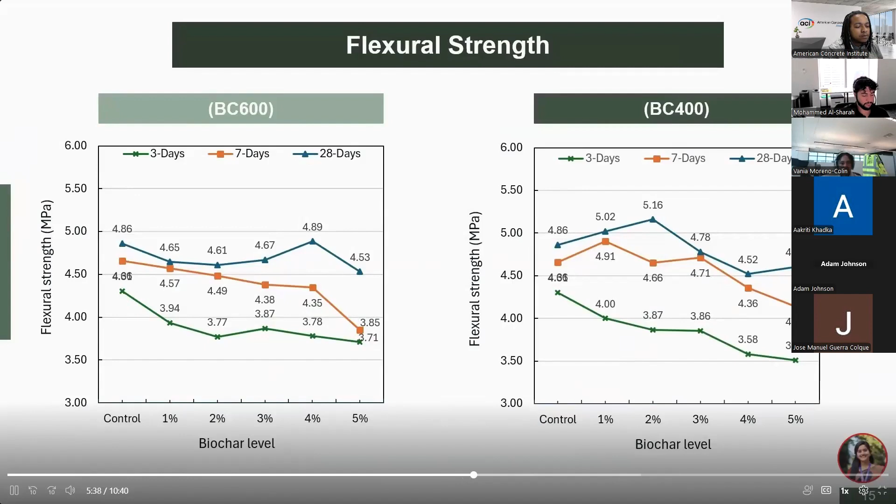From the compressive strength results, BC 600 showed an increase in strength up to 4% replacement with the optimum value of 31 MPa at 3%, which is about 8% higher than the control. In contrast, BC 400 exhibited strength improvement at every replacement level, reaching a peak of 33.9 MPa at 4%, which is 17% higher than the control. These findings highlight that incorporation of biochar at lower percentage can effectively enhance the compressive strength.

The UPV results showed that all specimens had values within the standard range for good quality mortar, which is between 3.5 and 4 km per second. This indicates that proper compaction was achieved across all mixes.

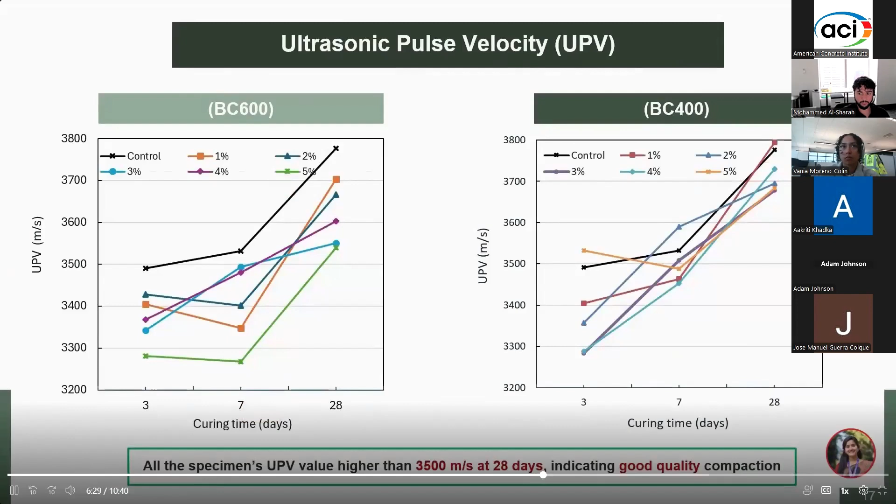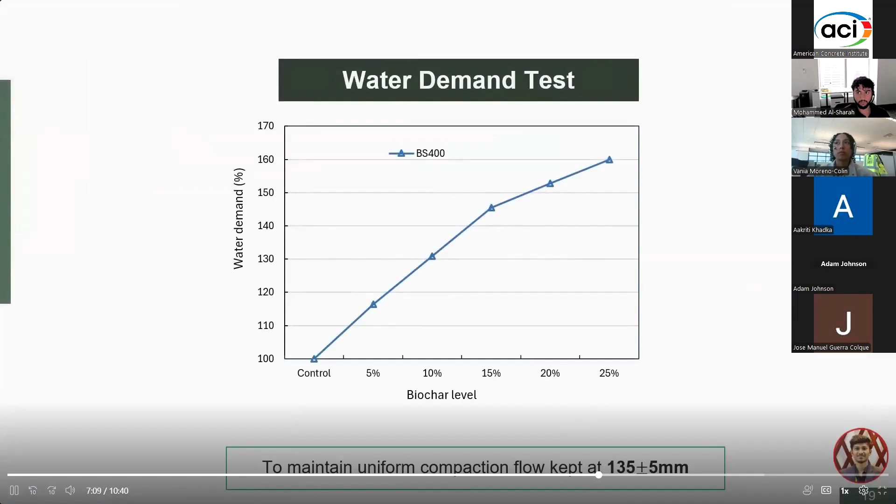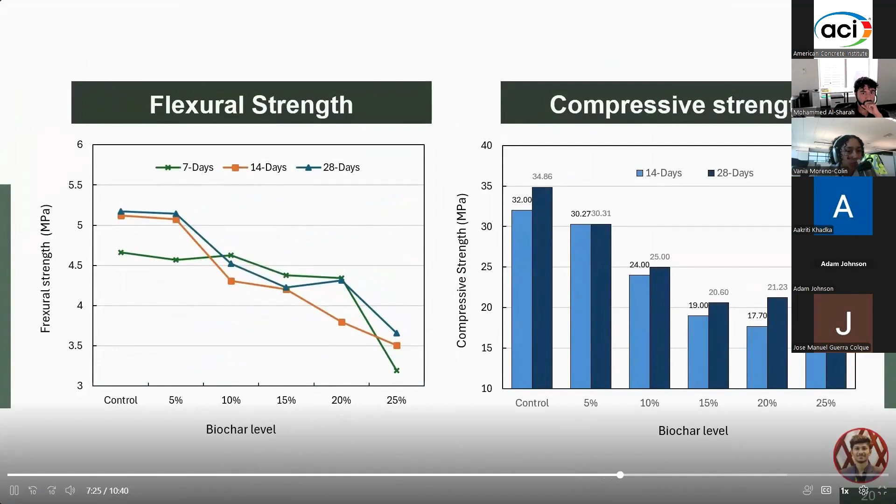Now let's see the test results on mortar sample for sand replacement. To maintain uniform compaction, the flow was kept at 135 ± 5 mm and water demand was adjusted accordingly. In the case of sand replacement, both flexural and compressive strength decreased with the higher percentage of biochar. This reduction is mainly due to the high porosity and water absorption of biochar, which affected the mix density and bonding.

Now let's see one of the most important portions of our research, that is life cycle assessment. To conduct life cycle assessment, we used OpenLCA software. The dataset we used was EcoInvent 3.11, the latest dataset from EcoInvent. The boundary condition was set as cradle to gate. The global warming potential time frame was for 100 years and the impact assessment method was IPCC 2021.

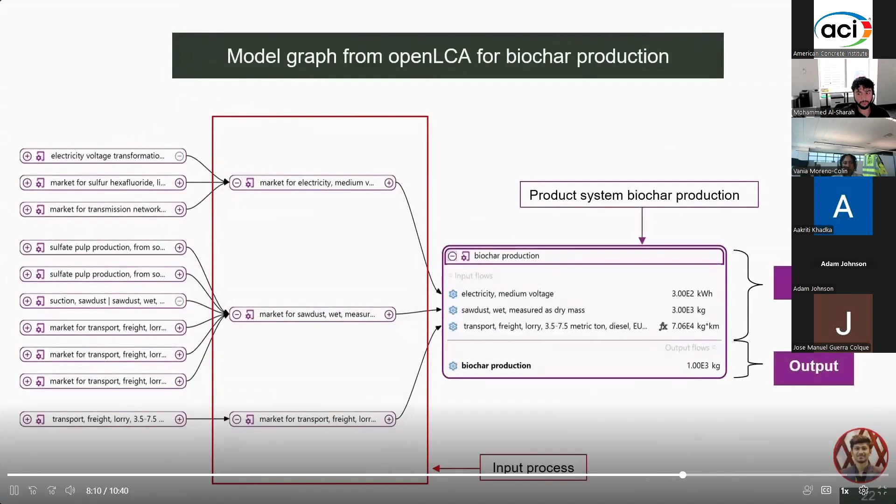Firstly, let's see the emissions regarding biochar production. This is the model diagram of biochar production. The input flow was sawdust, electricity required to produce biochar, and the transportation distance. The output flow was 1 ton of biochar. Let's focus on the results.

To produce 1 ton of biochar, 444 kg carbon dioxide equivalent will be generated. It seems pretty high value, though it is actually not, because as the biochar can sequester carbon, the net climate benefit is more than 2400 kg carbon dioxide from the production of only 1 ton of biochar. So producing biochar is good for the environment until we allow it to decompose.

When we incorporate biochar at various levels, the emissions decrease gradually. At only 5%, the global warming potential reduction is more than 12%. It is a huge improvement for our climate condition.

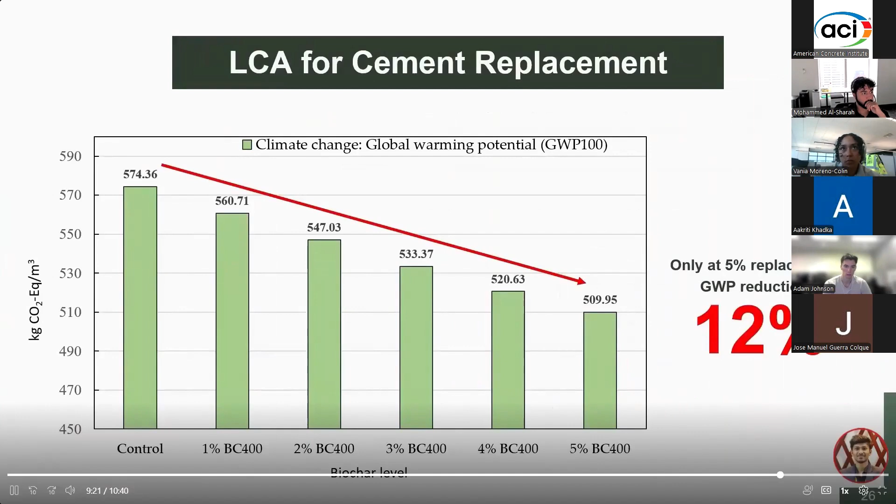So, to conclude, this study highlights that BC 400 outperformed BC 600 in both strength and sustainability. At just 4% cement replacement, a 17% increase in compressive strength was achieved, along with the 10% carbon dioxide emission reduction, which is a significant result.

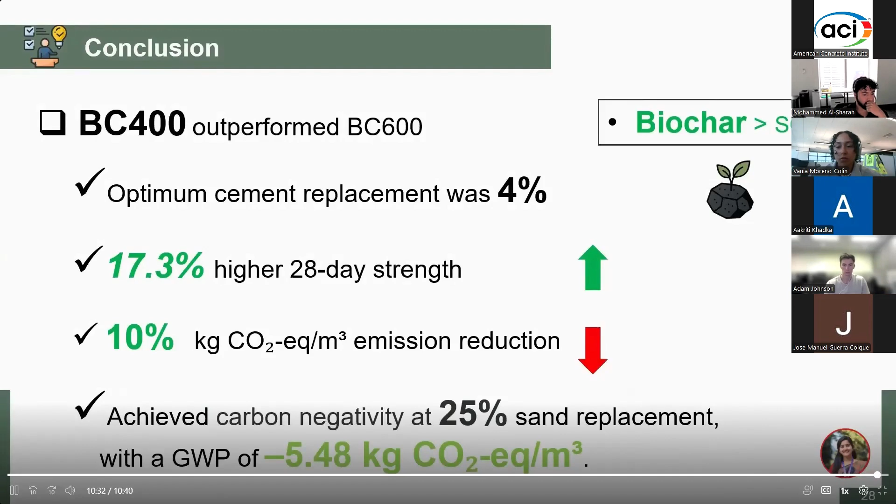Even with sand replacement, at 25% replacement, we were able to achieve a carbon negative mortar with minus 5.48 kg carbon dioxide equivalent reduction, which is remarkable considering the minor compromise in strength. Unlike conventional supplementary cementitious materials like fly ash, GGBS, silica fume, which mainly helps with strength, biochar not only enhances strength but also reduces a significant amount of carbon emissions, offering a dual advantage. Thank you.